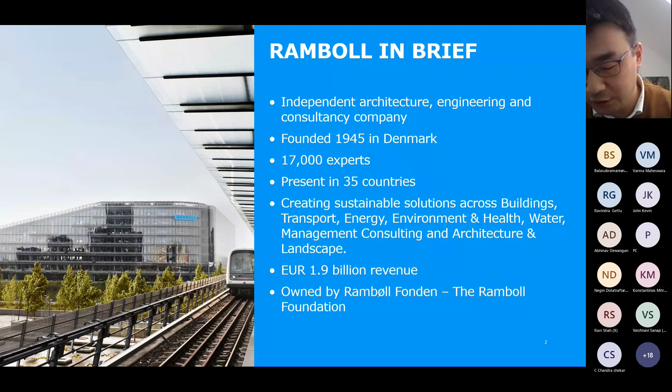Just for tunneling capability, we have been involved in many exciting projects, including the Fehmarn Belt between Denmark and Germany, which once built will be the longest immersed tunnel tube. We're also involved in Tideway in London, an exciting SCL project, as you can see.

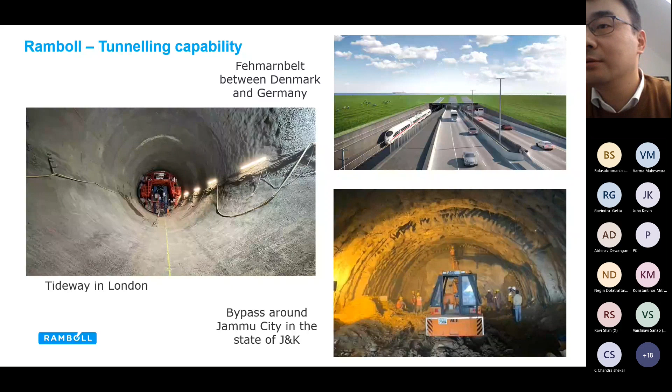Our Indian colleagues are also working on some exciting projects in India, including a bypass around Jammu city, which involves a bit of weak rock tunnel. So that gives you a bit of background.

For my presentation, it is mainly based on an article I published in the middle of last year, called the Tunneling Journal, in the June and July issue, with the same title. It's free to read online, so if you find my presentation interesting and would like to know more, you can go to their website to download the PDF and read it.

One thing I would like to mention is that this multi-layer lining concept originated from my past working experience with sprayed concrete tunnel lining, but the principle will also apply to tunnel linings with, let's say, precast segmental lining as the primary lining, followed by different types of secondary lining.

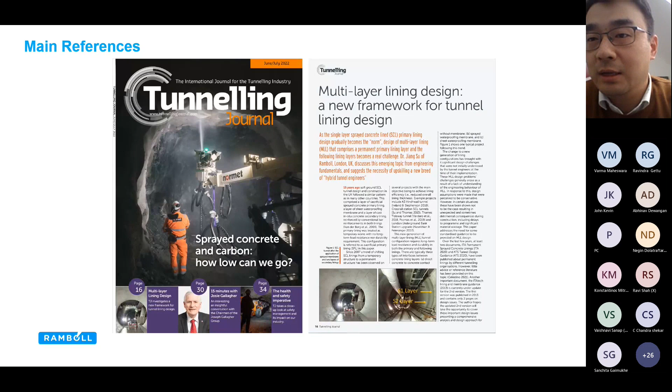For today's presentation, the structure will first cover the development of UK SCL tunneling over the last 30 years, since it comes from the SCL tunneling background. Then I'm going to talk about what multi-layer lining is and why it is different, followed by the status of the knowledge.

Then I'm going to give you a multi-layer lining example, based on a study I worked through before Christmas, which I'm going to try to publish as a conference paper. So you will be the first group of people to see these study results before anyone else.

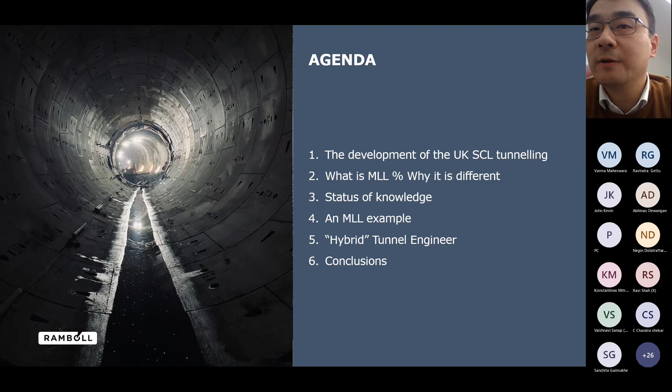In the end, I'm going to briefly touch on the importance of training the new generation of hybrid tunnel engineers, and we'll draw quick conclusions at the end.

So, development of UK sprayed concrete lining tunneling. The first use of sprayed concrete in the UK was not well documented. Based on my study and other literature, it was probably the Mersey Tunnel back in the 1930s, almost 100 years ago.

But 60 years later, in the 1980s, the SCL has been widely used for cavern construction in chalk for the Channel Tunnel. So it is a well-documented project because it's so big. It's between the United Kingdom and France.

And the next step is a few years later, the temporary SCL has been adopted for the Heathrow Express station following the successful trial tunnel. So it is actually the first time SCL was used in stiff clay, such as London clay in central London.

Obviously, it's only a temporary structure, so the tunnel engineers made some effort to improve this technique. So a few years later, in the same place at Heathrow, they built the Heathrow baggage transfer tunnel, and they tried part of the tunnel with a permanent spray concrete lining. As you can see, it's a step forward.

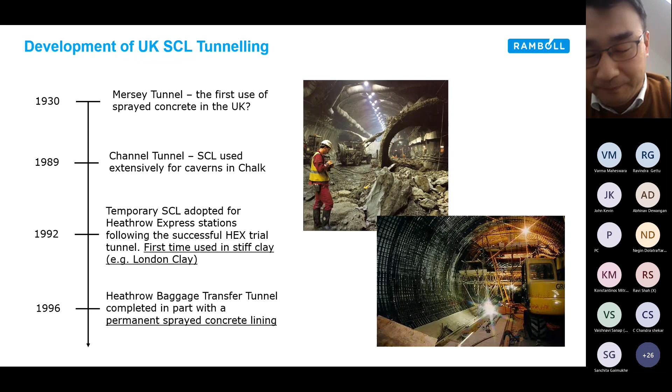Another few years, and UK tunneling engineers made another effort trying to make a single pass fiber reinforced SCL tunnel at Heathrow Terminal 5, because previously they had successfully done an SCL tunnel with permanent spray concrete lining. So they were thinking, maybe we don't need a waterproofing system and even no secondary lining, just a layer of permanent primary lining. If we design and construct the lining carefully, make perfect joints, it could provide both stabilizing function and satisfactory water tightness. But unfortunately, after the tunnel was built, I don't think it's quite an important tunnel.

It's probably a small tunnel, used for trial. And when people came back for inspections, they saw lots of damp patches, a bit of water leakage. It's not too bad because it's not collapsing, but the water tightness certainly wasn't reaching the expected level. So that's the reason the industry decided to bring back the waterproofing system and the secondary lining.

So that's the reason a few years later, in the A3 Hindhead Tunnel, it becomes the first use of the sprayed membrane in the UK, along with a sprayed permanent secondary lining above the groundwater table. And this is the figure showing over here.

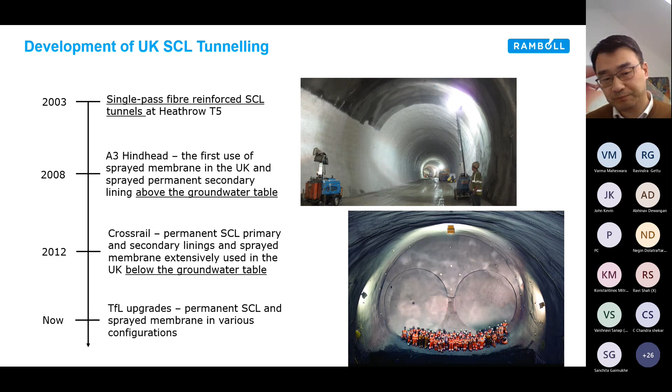So after that, about 10 years from 2012, there were a few more tunnel projects, such as the Transport for London upgrade, the Bank Station capacity upgrade, and also Thames Tideway projects, as well as the high-speed rail tunnels. So they adopted permanent SCL either for primary lining or just for secondary lining, with or without sprayed membrane, in various configurations.

So if I come to the detail about multi-layer lining, just to give some of you who might not be very familiar with this composite lining system - as you can see, this is a typical composite lining configuration.

It comprises a layer of permanent SCL lining, and then you've got a regulating layer, which is basically a cementitious layer using finer aggregates without any steel fiber. The purpose is to provide a nice smooth substrate to prevent any steel fiber from sticking out and damaging the spray membrane, which will be applied later on.

The common practice nowadays in the UK is to apply 2 layers of sprayed waterproof membrane with big contrasting colors - one layer is red, one is white. Because this kind of material contains lots of water during spray, it will evaporate moisture, so it will sometimes generate a hole due to shrinkage. In that case, you need another pass, just spray over to cover these holes.

For quality assurance purposes, this is to make sure it's definitely providing the required water tightness. Following that, you spray or even cast another layer of permanent secondary lining. As mentioned in the slides, the benefits of using the spray membrane is the double bond providing limited water leakage, and it also claims to provide potential savings on lining thickness, which is not the main topic of this presentation, but I can provide some reference at the end.

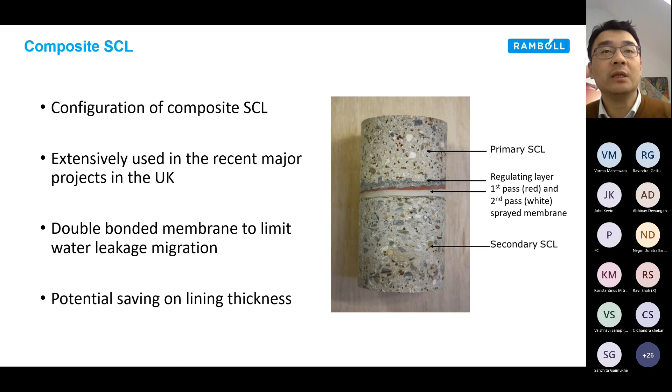In the UK over the last 30 years, there was a lot happening, lots of different configurations, and where we stand as an industry in the world in terms of SCL tunneling. It's quite difficult to get objective opinions from a third party.

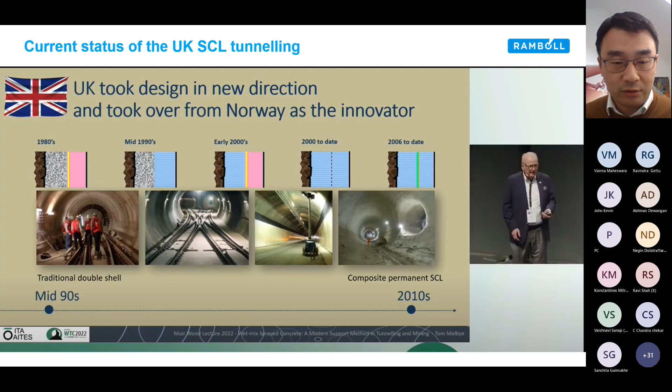From the mid-90s traditional double shell lining all the way to this latest composite permanent SCL - that's good news for us, which means we are really leading in SCL lining design, and we probably should keep going to see whether we can make any other improvement. So, what is MLL?

Based on what I've said over the last 5-10 minutes, about 20-30 years ago, when we had the Heathrow Express tunnels, we had this kind of traditional sprayed concrete lining comprising sacrificial primary lining, a layer of sheet waterproof membrane, and a layer of permanent secondary lining. It's usually cast in situ with heavy reinforcement inside. I guess that's still the most commonly used SCL configuration in the majority of world countries.

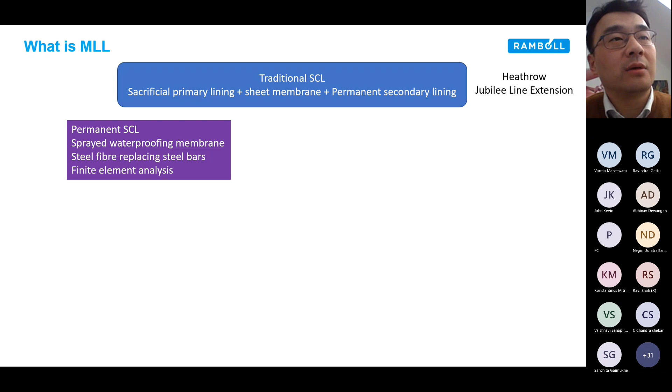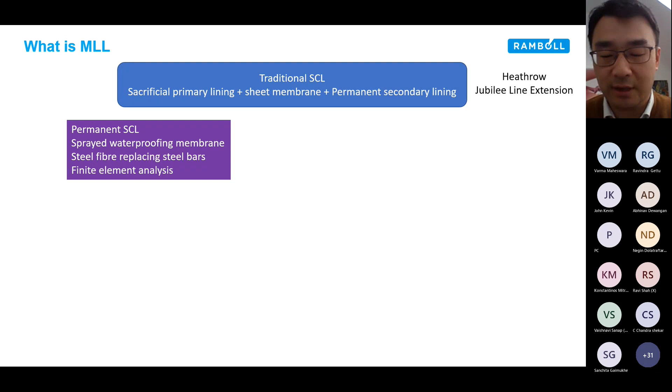Over the last 30 years, we have seen technology development. We have the permanent SCL, we now see using the sprayed waterproof membrane, and we are starting to use steel fibers, replacing steel bars in the lining. Also, we have more advanced finite element analysis to help us design the tunnel lining more efficiently.

On the other hand, we have pressure from the client and legislative bodies in the UK, such as health and safety requirements. We want reduced health and safety risk, better use of materials, reduced carbon footprint, and accelerated construction programs. Combined with all this technology development, as well as pressure from clients and contractors, nowadays in the UK...

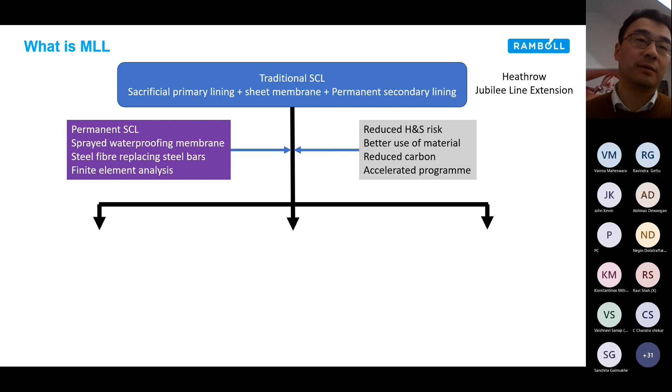The most commonly used or latest lining configuration is summarized in 3 types. The first type I give the name fully composite SCL. It comprises a layer of permanent primary and a layer of permanent secondary lining without membrane in between, so basically it's just direct concrete to concrete contact.

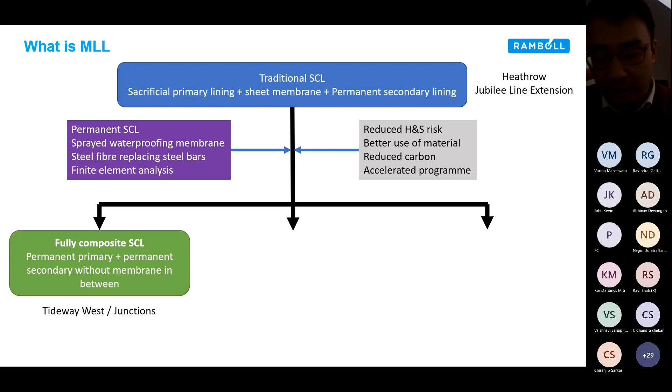The projects that this type of lining system has been used in are Thames Tideway West, and sometimes it's used in the junctions between tunnels, as well as shaft and tunnel connections. I'm going to give you an example based on this kind of lining system later on.

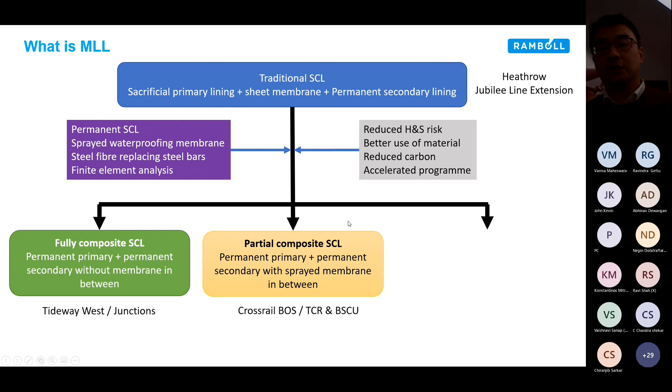The second one, partial composite SCL, typically people call them composite SCL - it's the one with 2 layers of permanent lining with a layer of sprayed membrane in between. As shown in photos in previous slides, it's being widely used in Crossrail, the Bond Street Station, Tottenham Court Road, Bank Station capacity upgrade. It's the most commonly seen lining configuration in London tunnel projects nowadays.

And the third one, I call them non-composite SCL.

It's basically almost like a more traditional SCL lining configuration, but using permanent primary and secondary lining with sheet membrane. This lining configuration is mostly used in situations when the ground is a bit wet, and after you build the primary lining, the substrate is too wet so you can't actually spray the waterproof membrane onto it. So it's being used in some other projects, also in Crossrail, in some stations like Farringdon, and also Tideway projects, central stations, central contracts.

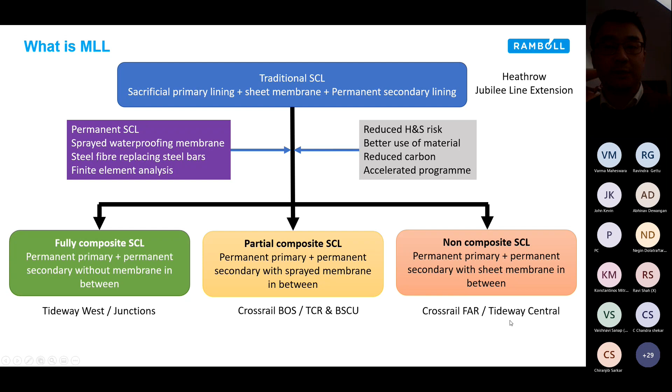With all these three different types of linings, I call them multi-layer linings. The main difference is that they all comprise at least 2 layers of permanent lining, with different types of interface in between. Remember, sometimes in the design, you might be designing not only 2 layers but 3 or 4 layers of permanent lining, with different interfaces in between.

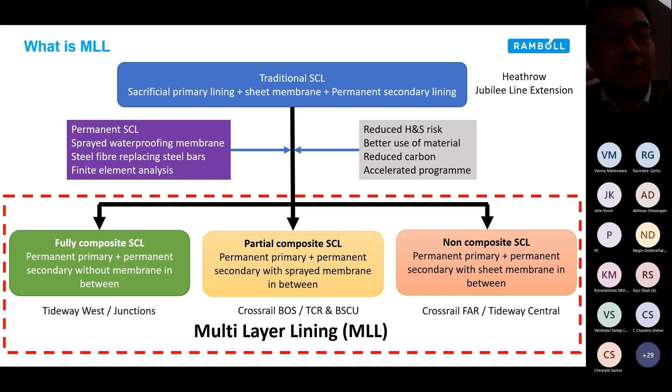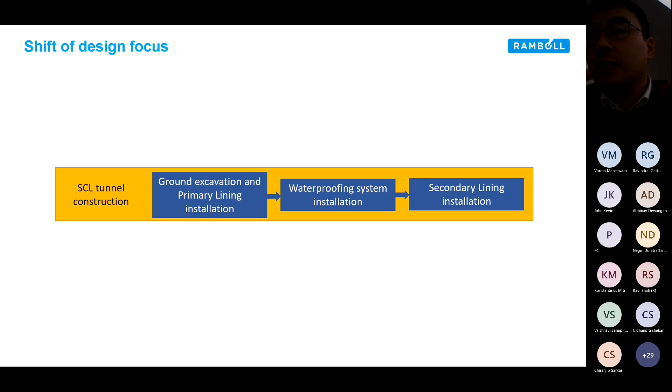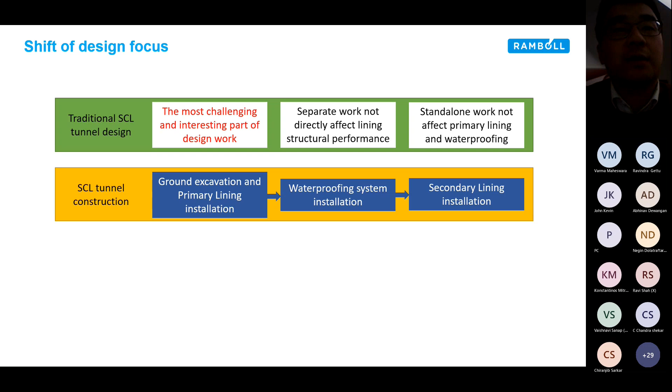So what's the impact of this multi-layer lining in terms of design focus? If we split the traditional SCL tunnel construction into 3 stages: the first stage is ground excavation and primary lining installation, the second stage is waterproofing system installation, and the third is secondary lining installation. The traditional SCL tunnel lining's most challenging and interesting part is the ground excavation and primary lining installation, because once you excavate the ground, you need to provide support to stabilize it without causing collapse. Once that's done, you're safe, so the rest of the work is more routine, well-established practice - you put sheet waterproof membrane, then cast in-situ secondary lining with shutters and quite heavy reinforcement, designed for overburden or very heavy load, so it's absolutely safe.

So what happens when we come to this multi-layer lining SCL tunnel design? Using the UK as an example, over the last 30 years there have been a lot of SCL tunnels designed and constructed in London at least, and they've almost become an established design and construction method. 30 years ago, there were probably only 1 or 2 tunnel consultancies that could claim they could do SCL primary lining design. Nowadays, my understanding is you've got more than 10 design consultancies that all claim they can do SCL tunnel design.

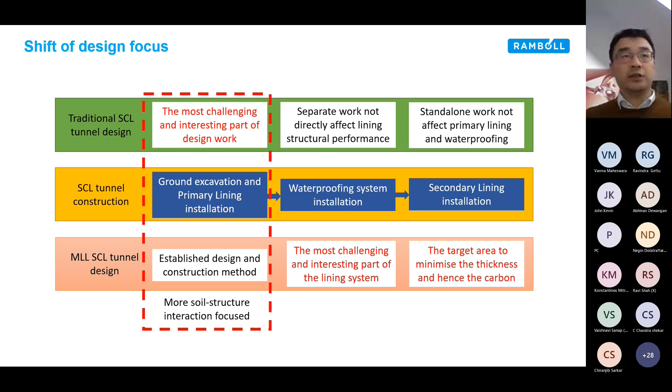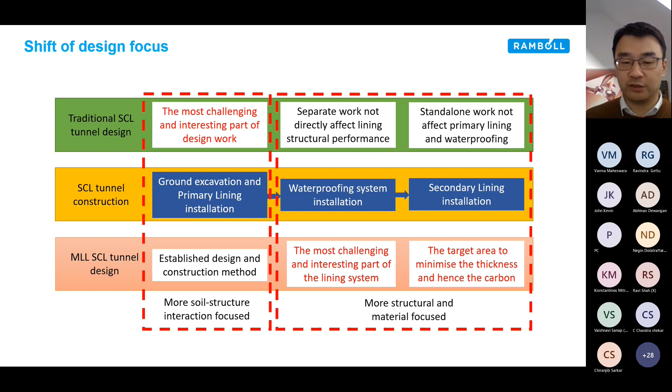So then the challenge, the interesting part, becomes the second and third parts - the waterproofing system and the secondary lining. For example, using sprayed membrane or no membrane at all, adding waterproofing agents into the primary lining mix, trying to achieve the same level of water tightness. This is very interesting. Also the secondary lining isn't just heavy reinforcement and cast in-situ - you're trying to do fiber reinforced secondary lining with reduced thickness to achieve efficiency in material, reduce construction program and cost, and hence the carbon footprint. So as you can see, from a design perspective, previously the focus was more on soil-structure interactions, but nowadays it's more about primary-secondary lining interactions and material efficiency - how to achieve maximum efficiency of using materials.

So what's the current status of knowledge about designing multi-layer linings? I have to say you don't have that much choice. For example, young tunnel engineers listen to great presentations from people in the UK, maybe from me or someone else, and they all say composite lining is great, and you want to design that in India or other countries, but you need step-by-step guidance. So usually you look for international guidance, such as documents published by the ITAtech Activity Group, or tunnel design guidance from the Australian Tunneling Society, trying to find a way to design multi-layer lining. But unfortunately this design guidance can't provide any practical step-by-step design guidance - the tips just give you introduction at a very high level, telling you what composite lining is and how it works, but you still have no clue how to design it.

Another way is you can try to find textbooks published by SCL experts such as Alun Thomas or Benoit Jones. They are all UK educated, trained, great tunnel engineers, but their books are also mainly focused on soil-structure interaction in primary lining design, and don't cover much about multi-layer lining.

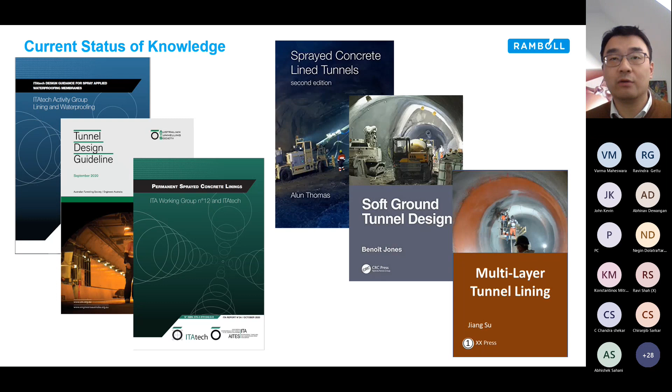It's my personal aspiration to probably publish a book in a few years' time, specifically to talk about this multi-layer lining. That's my great hope. So what's the status of knowledge? As I mentioned in the previous slides, we don't actually have many sources of information available for tunnel engineers to design multi-layer lining. If you read my article later on, I list 10 questions which I don't think anyone has publicly answered about multi-layer lining design and construction. I also provided some responses, but due to time limits I'm not going to cover all of them. I'll pick some interesting and key ones for today.

There are three topics. The first one is load sharing. It's quite an interesting topic, because if you design a tunnel with two layers of permanent lining, it's quite important to understand which one takes more load. Previously, if you were designing a primary lining as a sacrificial lining, you didn't worry about this question—your secondary lining would take all the long-term load. So this load sharing issue is key for designing the tunnel.

The second one is effect of composite action. 15 years ago, when I started my part-time PhD on this composite SCL tunnel, my original purpose was to try to prove that composite action is beneficial to the tunnel lining. After many years of PhD study, I actually proved that it's not beneficial to the tunnel lining, which is totally opposite of the original purpose. But I guess that's the meaning of PhD research—to identify the true engineering impact of some of these engineering effects. So I'm going to briefly talk about that as well.

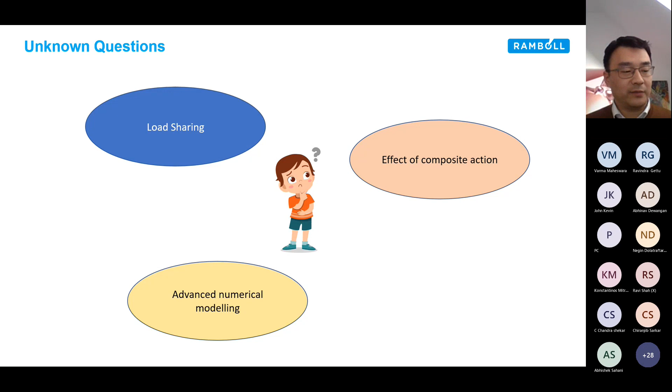The third one is advanced numeric modeling. If we're going to design any multi-layer linings, we need to use advanced numeric modeling to realize its effect. Otherwise, we design something that isn't real.

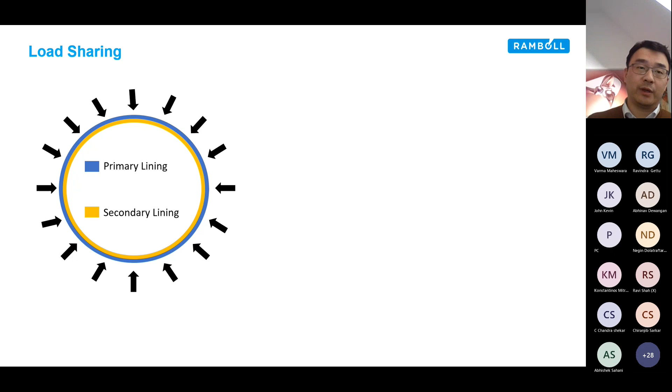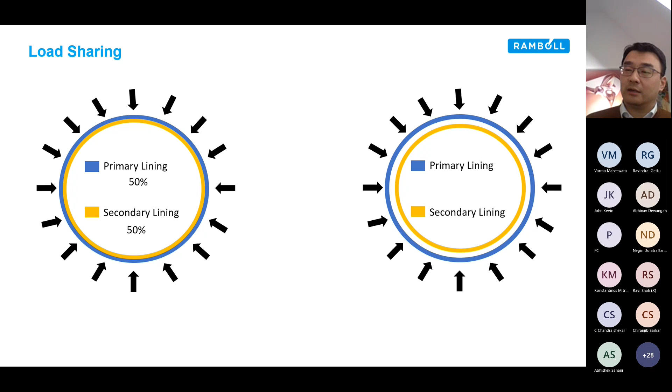For load sharing, I'll give you a very quick example. Imagine you have a perfect circular tunnel lining with the same thickness and same stiffness, under external UDL—uniform distributed load—with concrete direct contact. Because you have the same axial stiffness between the two layers of lining, the load sharing will be 50 to 50%. That's one extreme. Another extreme: imagine you have a waterproofing system in between the two layers, say about 10 millimeters thick, with stiffness so low you can imagine it's an air gap. Now you have an air gap in between the primary and secondary lining. Under the external ground load or any loads, the primary lining only converges by 5 mil, so actually your primary lining and secondary lining are not in contact. That means your primary lining is taking 100% of the load. So what does that mean? That gives you a general idea about the range of load sharing—basically, if you have reduced membrane interface stiffness, your load sharing will move from the left-hand side example to the right-hand side example.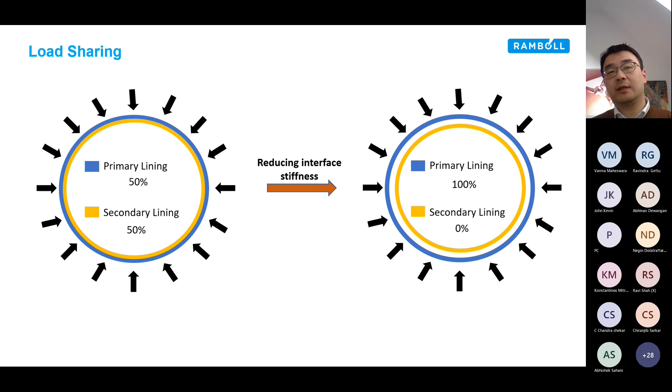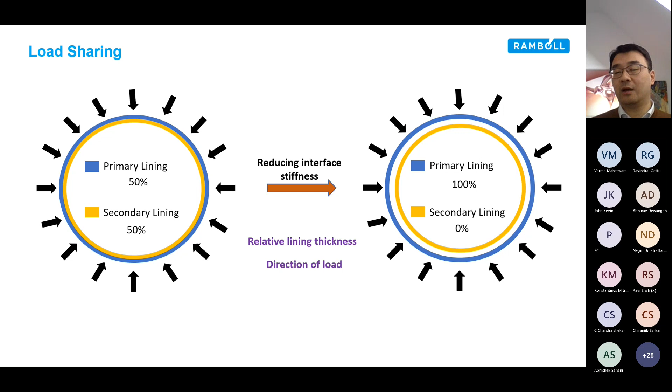Obviously this is not the only factor to consider. If we have different lining thickness—for example, if your primary lining is thicker, it will take more load—and also direction of the load matters. If we're designing a sewer tunnel with internal surge pressure applied inside out, for the first scenario on the left-hand side it's still 50 to 50% load sharing, but in the right-hand side case your secondary lining will take 100% of the load and your primary lining will take 0%. So the general conclusion is: the softer the interface, the less load the secondary lining will take, providing the load is coming from outside.

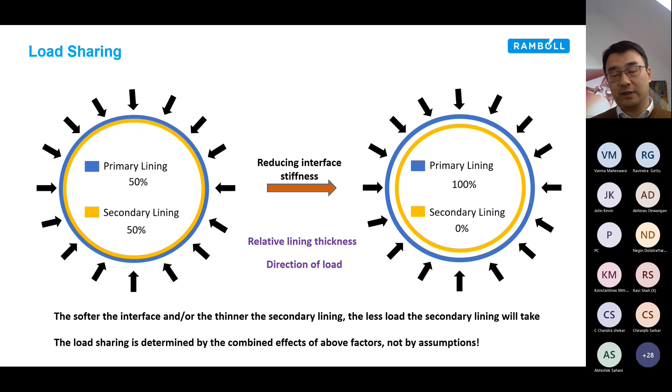Also, load sharing is determined by the combined effects of the above factors, not by assumptions—because this load sharing is so mysterious. Many people, when designing or doing a category check, don't calculate the actual load sharing. They just assume the primary lining will take 70% and the secondary lining will take 30%, for their design or category check. But there's a way to actually quantify the load sharing.

The second thing is composite action. So how does composite action work in tunnels? I'm going to give you an example about short-term effects and long-term effects.

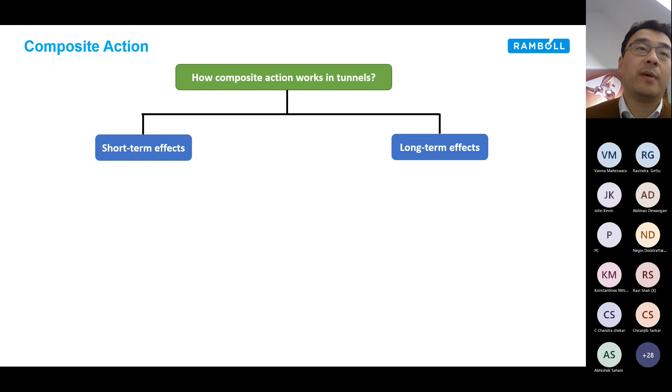For example, imagine you have an SCL tunnel, those two perfect circles, but with a flat invert over here. If you have a permanent primary-secondary lining with a sheet waterproof membrane, so that you don't have any tension, you can allow it to separate.

After you spray or cast your secondary lining, it will shrink due to early thermal and shrinkage effects. So the secondary lining, under self-weight, will develop a bit of tension, as you can see - that's the red colored part, inside of the secondary lining and outside of the shoulder of the secondary lining. But if we've got a sprayed membrane...

Because the membrane has a bond effect, your secondary lining cannot move away from the primary lining, so that tension will develop in most of the secondary lining. Noticeably, the biggest tension will be generated in the secondary lining crown inside and also at the knee positions.

That's the reason why most SCL tunnels, like partial composite lining tunnels, are usually designed as non-composite tunnels nowadays in the UK at least. After construction, in the very short term, you will usually see longitudinal cracks happening on the crown. I've personally seen this happen multiple times, and people don't understand the reason, but that's the reason.

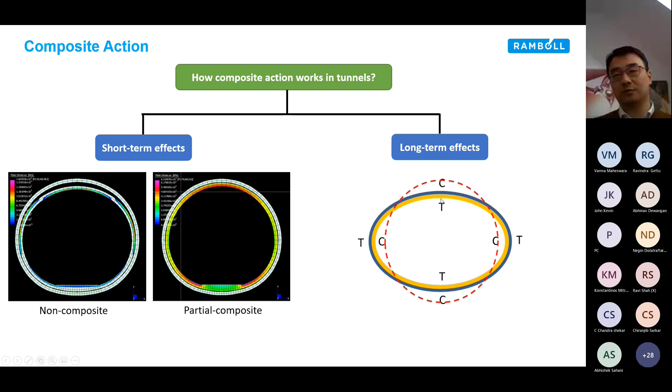You've got compression at the axis level, at the intrados of the secondary lining. So again, the biggest risk is at the secondary lining crowns, because they usually have lots of tension being developed. Basically, based on my study and observations from real projects, the lower the degree of composite action, the better for the concrete tunnel linings.

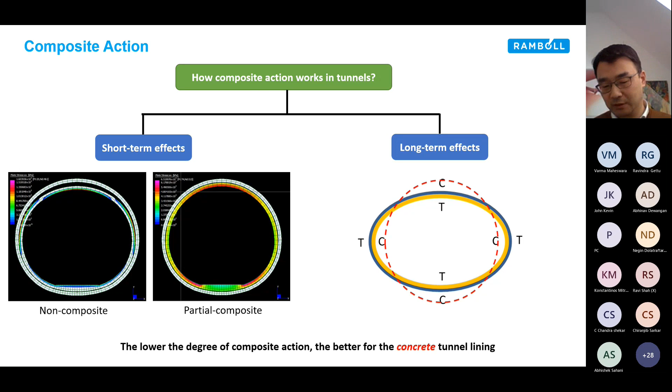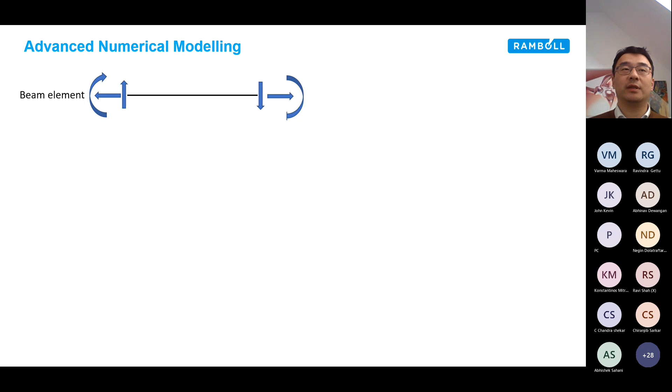Third one is advanced numerical modeling. Historically, or in most scenarios, people model tunnel linings using beam elements in 2D or plate elements in 3D, but you can't use these for modeling multi-layer linings.

The key to modeling the primary-secondary lining in the multi-layer lining interaction is that you need to have in-plane shear to allow composite action to be generated. If you look at the beam or plate elements, they only have 3 force components: out-of-plane shear, axial compression/tension, and bending. They don't have this in-plane shear.

So if you stick 2 layers of beams together, or 1 layer of beam and 1 layer of volume elements together, you can't model the composite action properly. So basically, if someone tries to design a multi-layer lining using 2 layers of beam elements, you don't even need to look at the result - you know the result will not be correct.

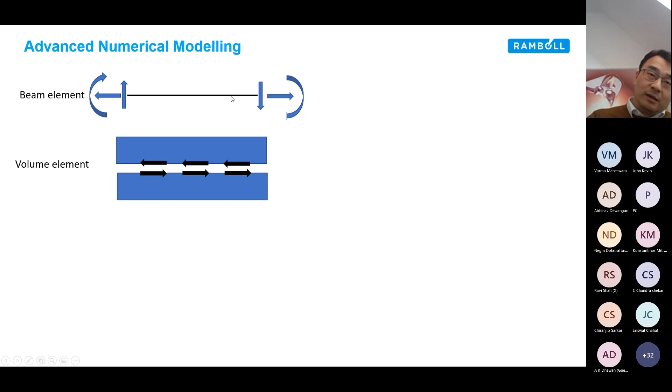The advantage of using volume elements is that by using advanced concrete nonlinear plastic models, you can model plasticity and cracks. You can predict the cracks in the tunnel lining.

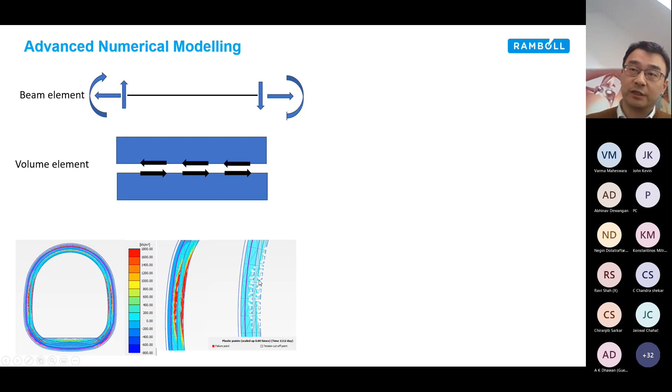Another real project example is that it can simulate the shrinkage. For example, this shows the primary lining - in this case, it's actually a kind of segmental lining. Once you cast the secondary lining, we assume it will debond a bit, resulting in some gap being generated, then you apply some construction loads.

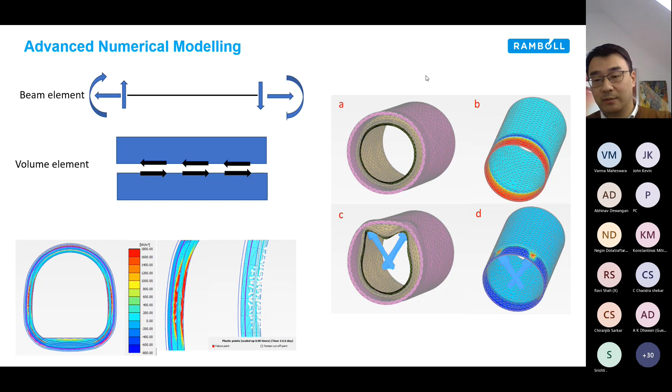Push the lining back, close the gap. In these scenarios, you can see the maximum tensile stress, and you can actually calculate the maximum crack width. This is a real case where we successfully predicted the maximum crack width up to 0.3 millimeters, and we measured that - the maximum crack width was indeed 0.3 millimeters, and it happened only once.

So it's a great success in terms of using this multi-layer design advanced numeric modeling for real tunnel projects. I'm going to quickly give a real example to demonstrate the power of this multi-layer lining concept, using advanced modeling technique and the understanding of multi-layer lining to back-analyze a cracking issue that happened in a real project. This is a real project in London.

Finished a few years ago, this is a plan of the SCL platform tunnel. Basically for SCL tunnels, you've got platform tunnels on the top and bottom, which I didn't show, but this is a station box. You take an escalator coming down, you have this concourse tunnel, then you have 4 cross passage tunnels linking to 2 platform tunnels, so that people can get onto the train.

After the construction of this concourse tunnel and the cross passage tunnels, we witnessed on site very obvious longitudinal cracks being developed. For SCL tunnels, you can see some local small cracks - no problem, you always get a bit of that, material issues, imperfect workmanship, etc. But for this kind of extensive, this level of longitudinal cracks, it's a big one, and people are drilling holes. You can see there's spiral cracks all the way through the lining, and it's quite big.

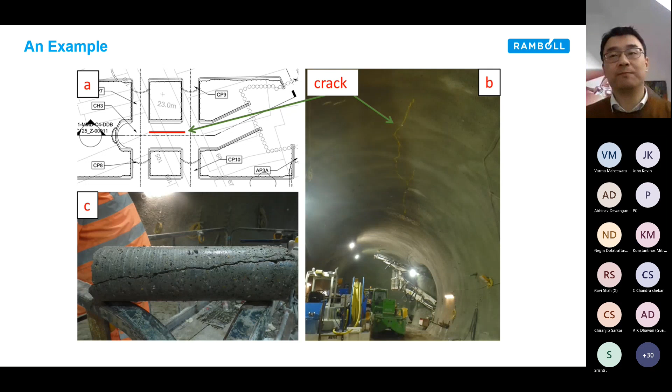But do we really understand it? I don't think anyone in the industry has answered these questions. I discussed it with the original designers, and they still don't have a clue how it happened. So I'm going to try to explain this by using this multi-layer framework.

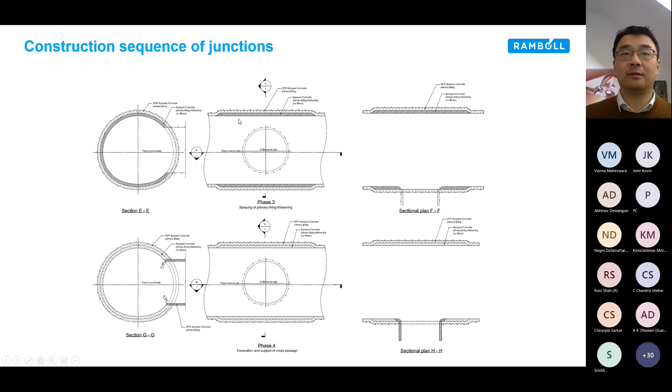Before I go into this numeric modeling, let me briefly introduce the construction sequence of the junctions. For the junction construction, basically first you build up a layer of primary lining, then around the openings you put some reinforcement locally, then you spray or cast another layer of lining - usually we call this the thickening layer.

Then you break out to construct the cross passage. So the cracking happened actually in the thickening layer, not the primary lining. The tunnel wouldn't fall down, but the thickening layer got such big cracks - it's not great, especially if the client comes down to visit the tunnel.

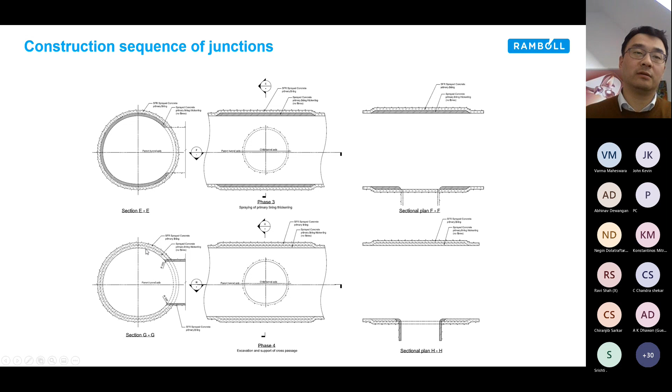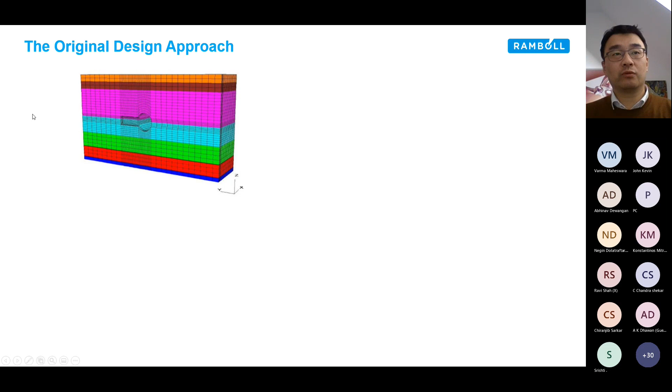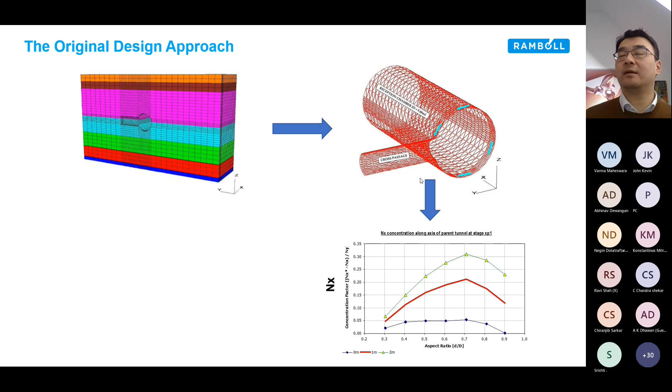So the original design approach was to use FLAC, many years ago, in 3D, to build up the parent tunnel - the main concourse tunnel - with a total thickness of about 800mm lining, and then create the cross passages. Then you would see the stress concentration factors around the openings, and design the extent and magnitude of the rebars - how far it extends, and whether it's B25 or B32 reinforcement. At that time, this was the most advanced design methodology.

However, it still had some shortcomings. If you look at this design methodology nowadays, first, it did not consider the sequential construction. In reality, the primary lining is constructed first and resists all the short-term load, and when we put in the thickening layer, in theory it does not take any external load - it experiences some shrinkage, self-weight, and early thermal effects, but not external ground load and groundwater pressure. Also, the impact of multiple junctions was not considered - only one junction was considered. And obviously, as I mentioned, early age thermal and shrinkage effects were not considered.

So in order to simulate all these effects, we need to use advanced modeling techniques, using volume elements rather than plate elements. Just to clarify, when I talk about these shortcomings, I'm not criticizing the original design approach - I believe it was the world-leading design approach at that time. But with time passing, we have more powerful computers and a better understanding of this multi-layer lining system, so we move to the next step.

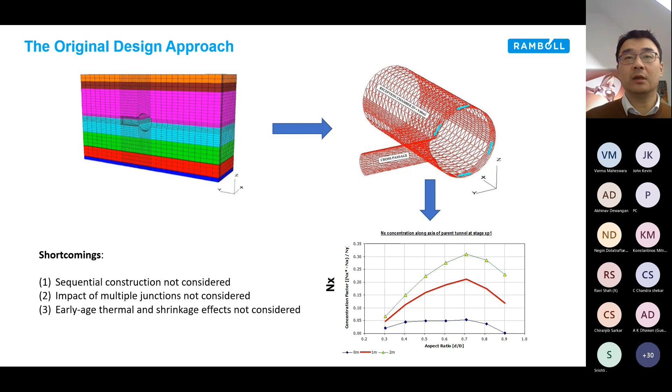For the numeric modeling, it's a typical Plaxis 3D model with typical London stratification made of made ground, river terrace gravel, and London clay, with this platform tunnel, 2 platform tunnels, this concourse tunnel, and 4 cross passages. The pilot tunnel is modeled as a plate element, and the concourse tunnel is modeled as a volume element, as you can see.

Three models were developed to demonstrate the effects of this multi-layer lining framework. The first is almost the original approach, where you don't model the sequential excavation - you just put the primary lining and the secondary layer together in one go, with no early thermal and shrinkage effects considered. The second considers sequential construction, but not early thermal and shrinkage. The last one, from my perspective the right approach, considers both.

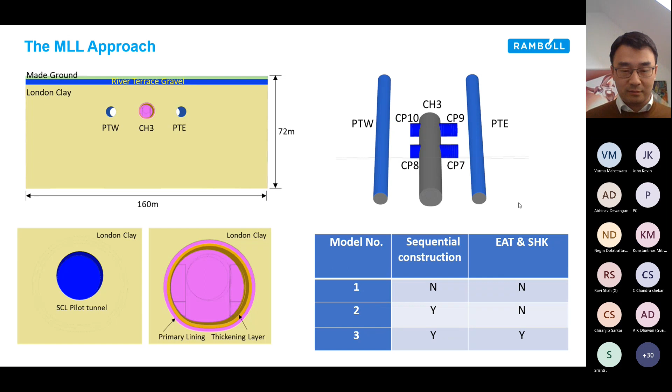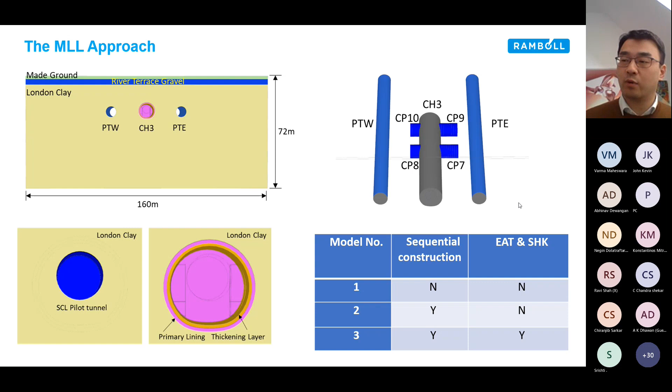Bear in mind this is kind of my little mini study. The main purpose is to qualify the reason why this has happened, rather than give a very accurate number in terms of quantifying the contributing factors.

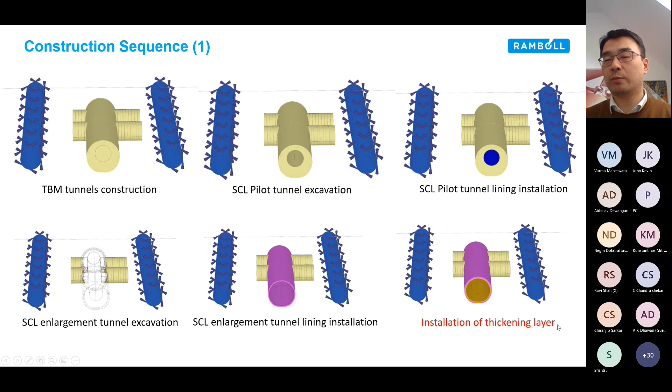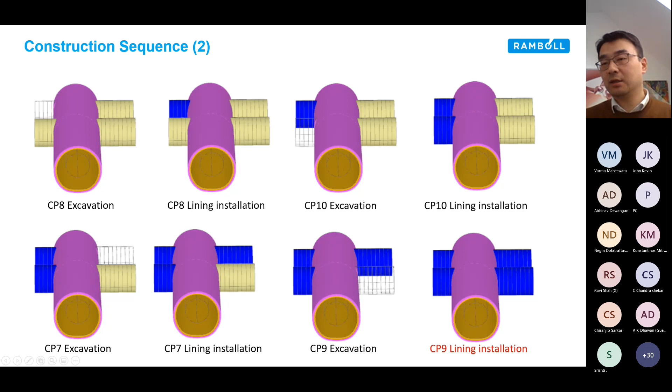Quickly, the construction sequence: first using the volume method for TBM construction, then you do the SCL pilot tunnel and lining, then the enlargement, put your primary lining, then your second layer. This is the key stage - I will present the result at this stage. Then the next stage is construction of the 4 cross passages, and I will present the result for that stage too. So that's the 2 key stages I'm going to present results for.

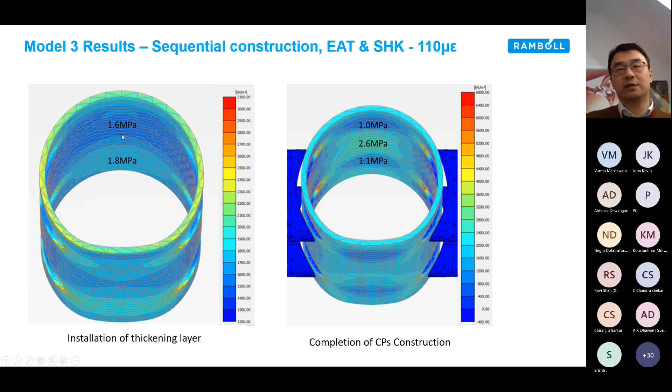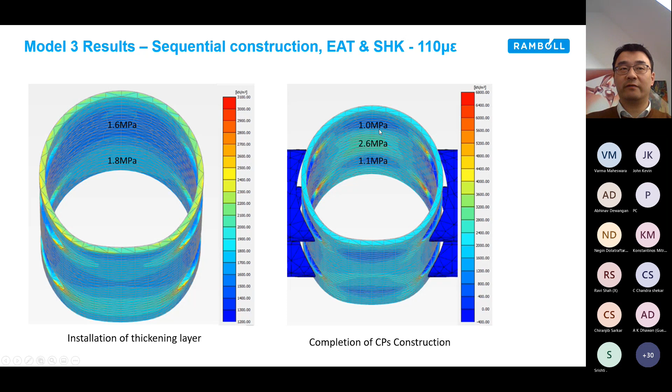So it's not cracked in theory, but then after you do the cross passages, you can see the central area, not right above the cross passages but in between, will develop a tensile stress greater than 2 MPa. In theory, this will cause cracks, but the other part will not, it's lower than 1.8, 1.9, so there will not be any cracks happening. So that kind of perfectly matches the observed cracking scenario.

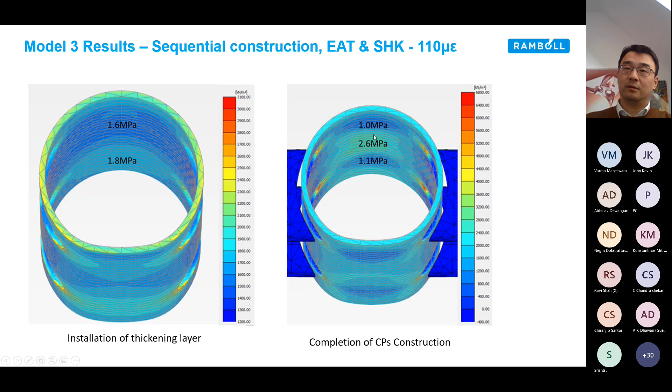Okay, so then the next question is why the cracks only happen over here, not over these places. So I'll give you an explanation.

This is deformation of the tunnel linings, of the thickening layer. This bit is the head wall, the end. So you've got the cross passages. When you have a head wall, because it's so stiff, it does not deform at all, a little bit. So it's still quite circular. You don't develop much bending.

And for the area where you've got cross passages, because you dig a hole there, your lining, the ring stiffness is reduced. So it deforms more, not circular. It is only the middle part, you don't have a hole over there, so your stiffness is still there. It kind of does its best job to resist the external loading by deforming a lot.

So basically the crown bit is so flat. Everyone knows, if you have a relatively flat structure resisting the external load, you will develop bending rather than axial compression force. So that's the reason the cracks open here.

And also, if you review the modeling result, the maximum tensile stress is actually not only showing in the intrados of the thickening layer, it's all the way through the back of the thickening layer. That corresponds to the observations that when you dig a concrete core, you will see the crack depths all the way through the thickening layer.

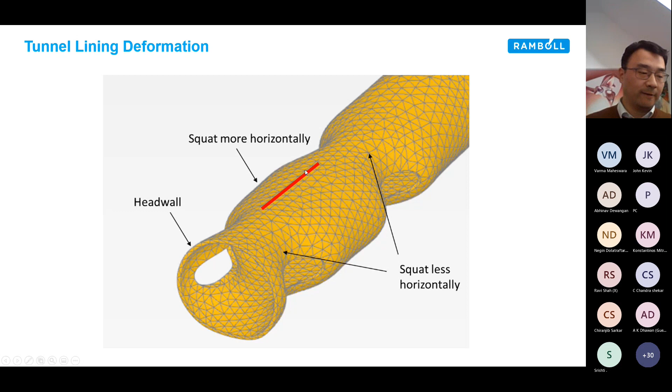Okay, so after giving this presentation, this is kind of important about training the next generation hybrid tunnel engineer. As you can see in the example, if you think about historically how tunnel engineers design for soil structure interactions, most engineers come from engineering geology or geotechnical background, and not many people come from structural or material background.

But nowadays, if you want to carry a full life cycle multi-layer lining design, you need to understand a bit of geology, and you can derive geotechnical parameters so that you understand the ground behavior and do soil structure interactions. Then after that, you need to understand the structures, like primary and secondary lining, or in this case primary lining to thickening layer interactions with different interfaces, and also the results you get are not just bending moment and axial force, now you get the principal stresses or strains.

By using that, you need to be able to predict the crack width to see whether the lining works well or not. And also you need to understand material behaviors, such as early age thermal shrinkage effects, and also different membrane properties, and how they behave between the two layers of concrete linings.

So just in conclusion, multi-layer lining is a new trend focusing more on the structural and material aspects, and currently there's no detailed design guidance. This multi-layer lining framework covers a wide range of topics, and I've demonstrated in my example that using a multi-layer lining approach is able to design the tunnel lining efficiently. In this case, it's kind of back analysis, to understand the engineering reason why it got cracks.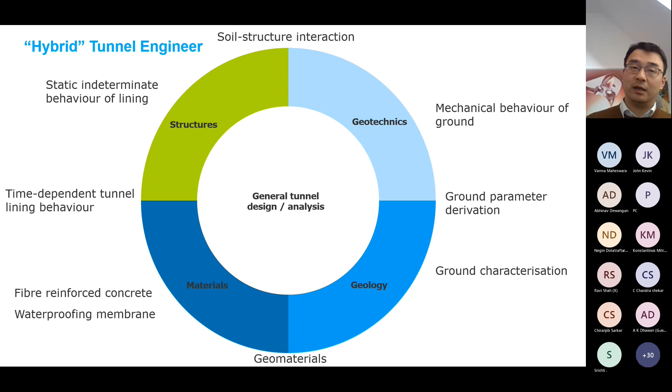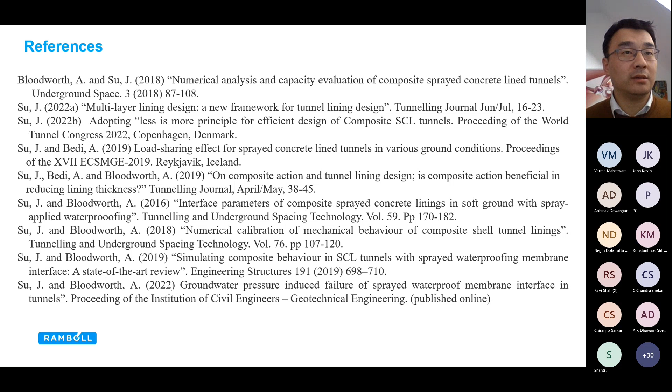And last but not least, there's a need to train a new generation of hybrid tunnel engineers, with a slightly balanced skill set on the ground part, and also the material structures, being able to do a good full life cycle multi-layer lining design. In the end, there was some reference for this, mostly my own publications on this multi-layer lining topic framework. And if anyone is interested, you can read them and they'll help you go to sleep. Thank you very much.

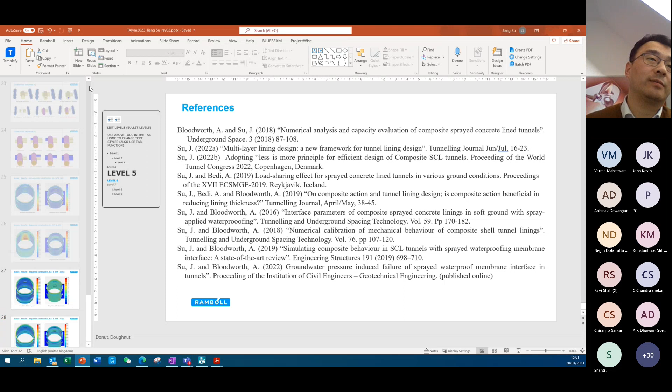Regarding the Thames Tideway tunnel, you said you used permanent primary and permanent secondary lining without any membrane in between. Yeah, we used that - it's the Thames Tideway West project, there's actually a published paper on it. It's the permanent primary lining and permanent secondary lining in direct concrete-to-concrete contact.

So there was no requirement for a waterproofing membrane there? I slightly mentioned that but didn't emphasize it. That's the reason they added a product called Xypex - I think it's a liquid additive. You add it into the primary lining concrete mix. It says that once cracks appear in the lining, it will crystallize itself to fill the voids, and that's been a big innovation on the Thames Tideway West project.

So the design purpose is using a high-performance permanent primary lining, which is already supposed to be watertight, plus this Xypex water-tightness agent, to provide almost like 2 layers of barrier to water for watertightness purposes. I think if you search Xypex on Google, on their website, they mention it's been used in Thames Tideway West.

So it was like a self-healing sort of concrete you were describing - if cracks happen, it will crystallize, something like that, if I'm getting it correct?

Sorry, can you repeat your question? You said if cracks happen in the concrete, the material you use will crystallize - so it's a sort of self-healing technique, something like that?